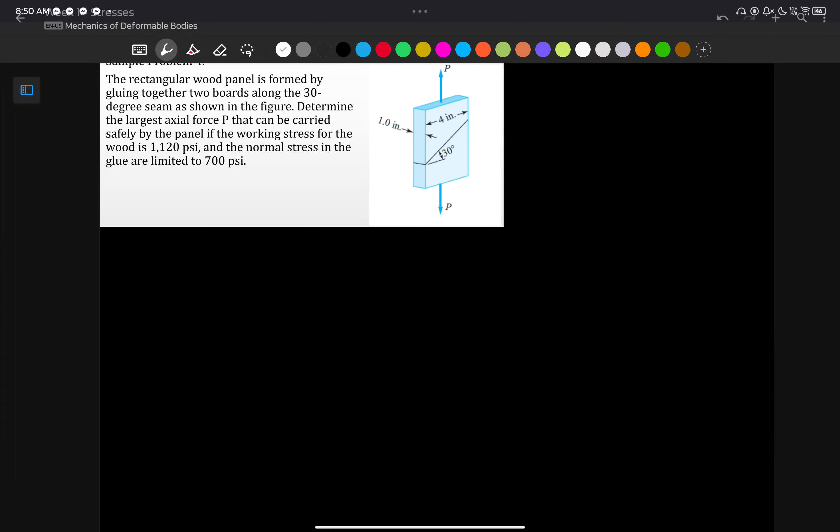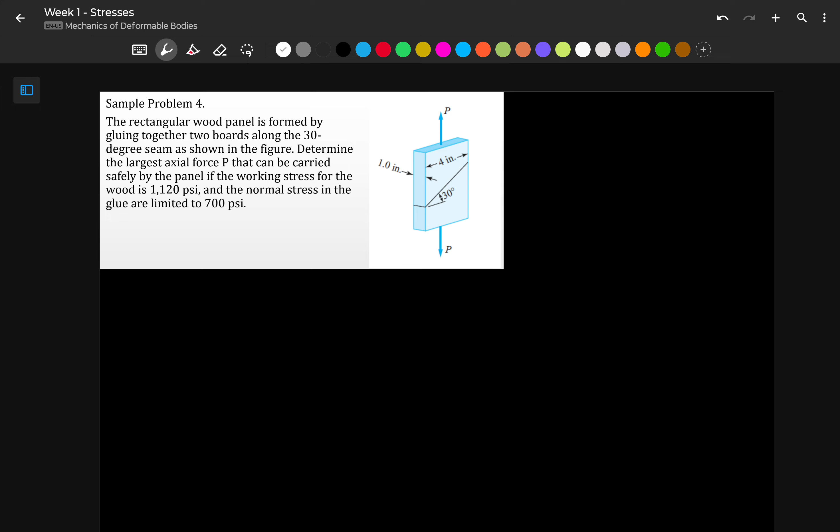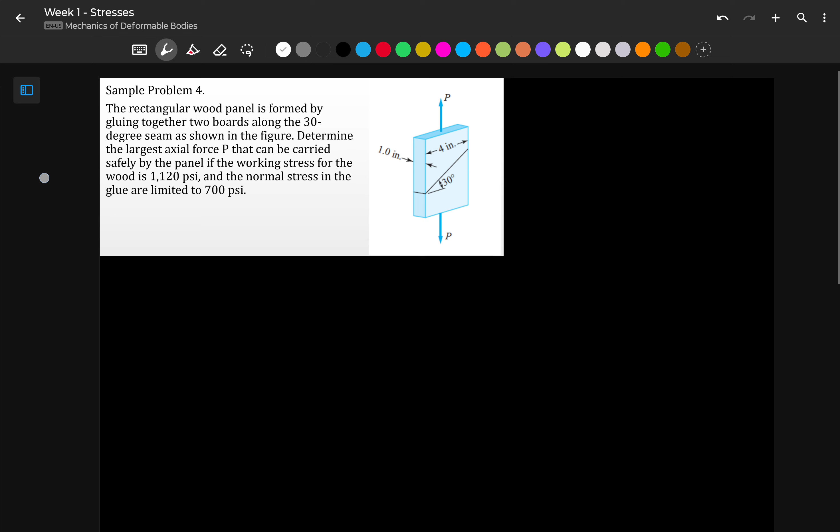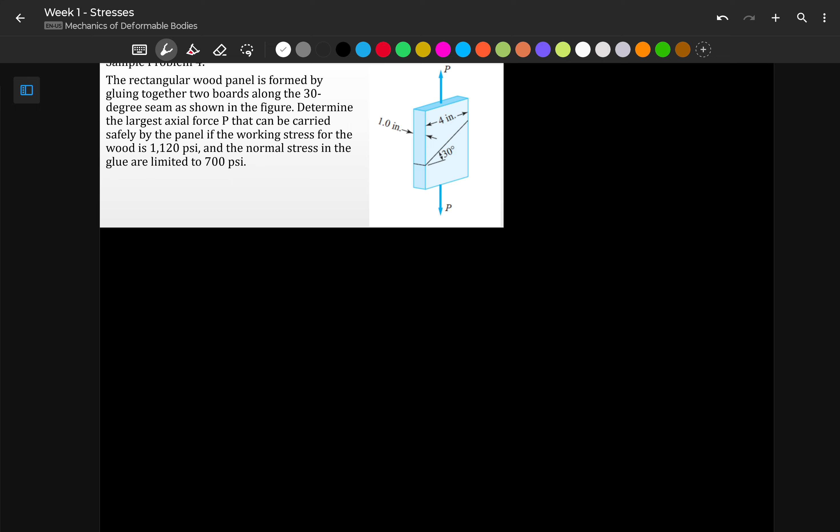Let's do sample problems, starting with sample problem number 4. We have a rectangular wood panel formed by gluing together two boards along a 30-degree seam, as shown in the figure. Determine the largest axial force P that can be carried safely by the panel if the working stress for the wood is 1,120 psi and the normal stress in the glue is limited to 700 psi.

So we have two working conditions. This one is just the capacity of the wood. Let's take the first one. It says here, the working stress for the wood, so the capacity of our wood to carry is 1,120 psi. Whereas the capacity of our glue is 700 psi. Let me draw the figure.

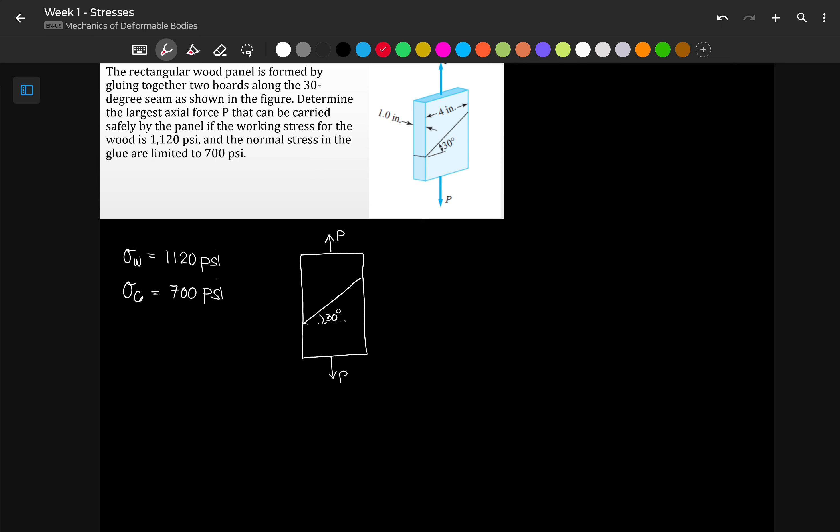Now we have to imagine how this could fail, because the area where the failure happens is the one experiencing stress. One area won't break if it's not experiencing stress. So we have to imagine the possible scenarios where this wood could fail.

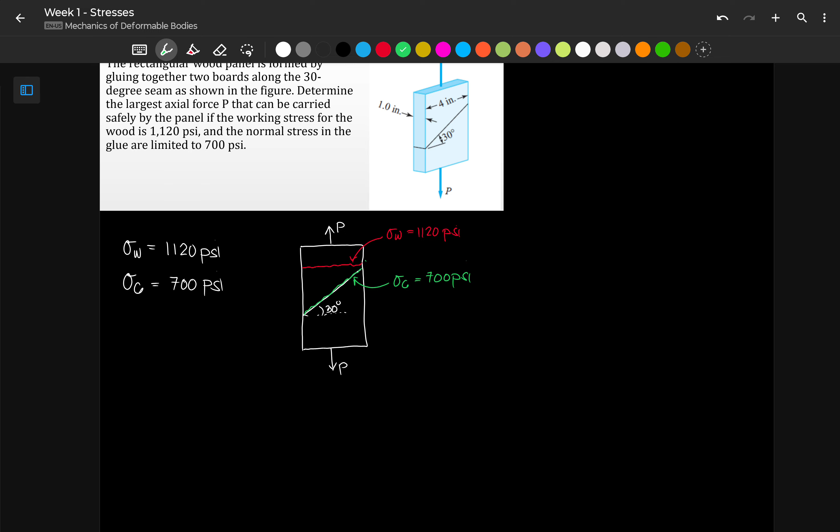So let's look at failure on the wood. When the wood itself fails, what happens is... let me draw the figure.

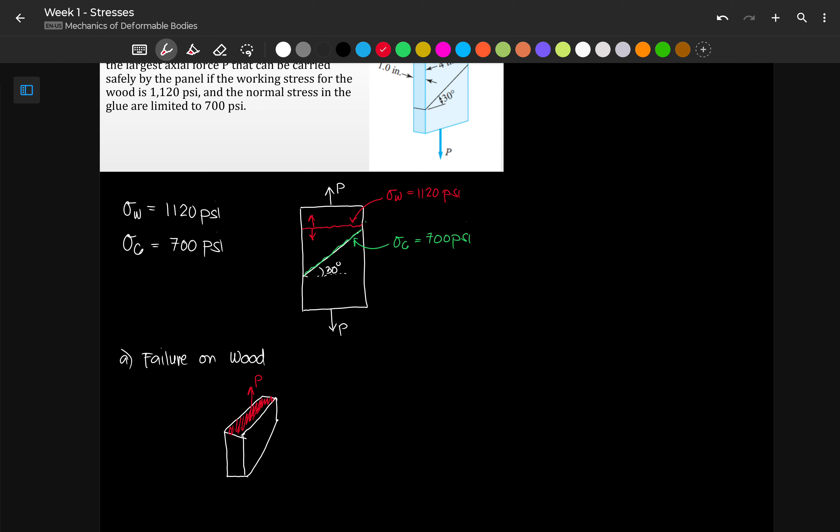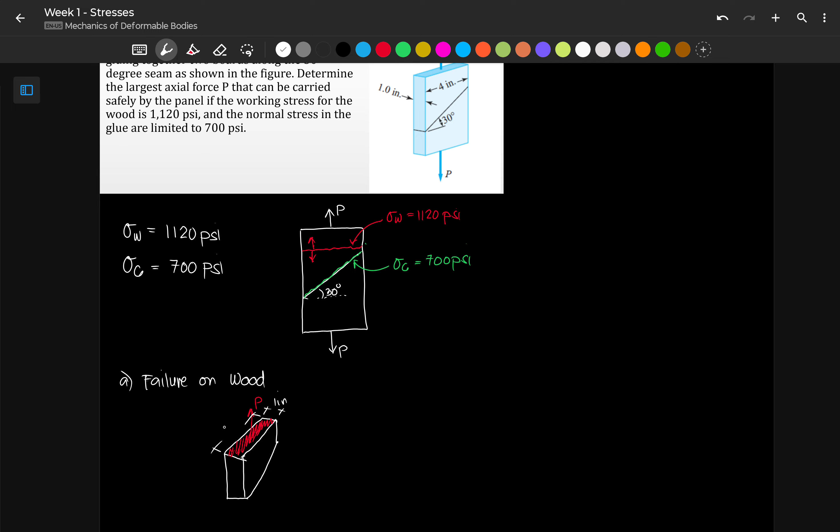According to the figure, the dimension of this area has a width of 1 inch and a length of 4 inches. Therefore, the area that resists P is just 4 inches by 1 inch. This is the area that resists so that the wood doesn't break.

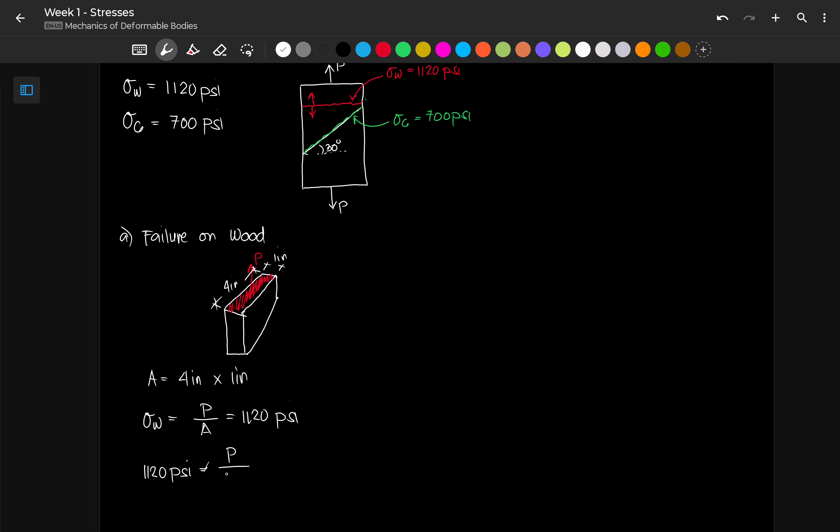Now, computing the stress, that's just P over our area. According to the problem, the capacity of our wood is 1,120 psi, which is all it can carry. So this 1,120 psi equals P, which is what we're solving for, divided by the area of 4 square inches. So our P here will be 4,480 pounds.

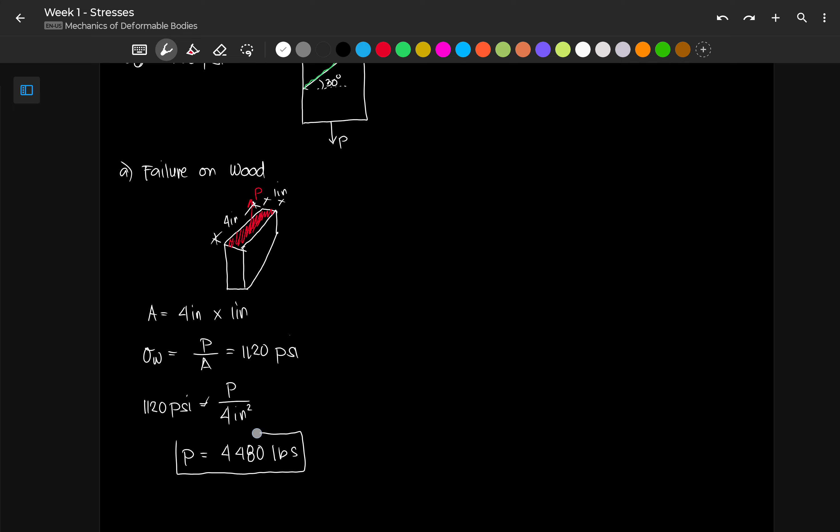That is the force needed to break the wood in this failure mode. So this is based on the capacity of the wood. You can also call this based on the capacity of wood.

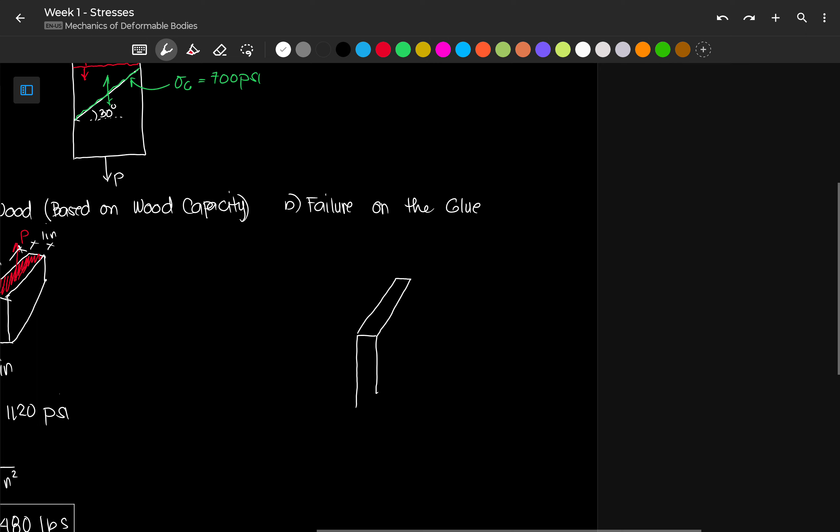Okay, so this is the lower half. Meron pa rin tayo ditong 30-degree seam.

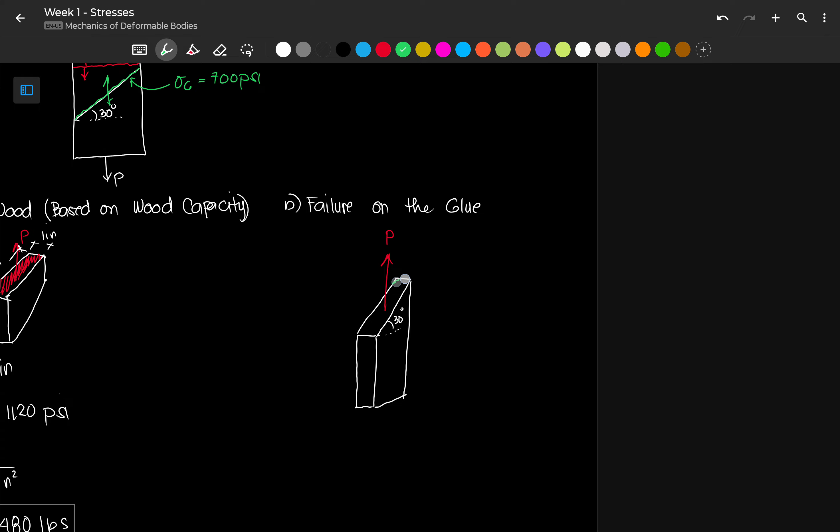Alright, now yung force natin is meron tayong naka-applied na vertical force, P. But take note, kung ang failure natin ay paghihiwalay ng glue, breakage ng glue, therefore ang area ang nagre-resist niyan ay itong wood area, di ba? So hindi naman pwedeng hindi yan yung magre-resist kasi siya nga yung nag-fail. Therefore, siya yung nagre-resist ng load.

Kung ito drawing natin in side view, mahirap kasing i-visualize dito. Gusto ko lang maipakita sa inyo kung ano yung itsura pagka naka-ISO.

Ayan, so meron ta rin tayong force P dyan. Pero take note, sabi sa atin, ang normal stress dapat perpendicular sa area. Kung naka-incline yung area natin, therefore the force acting on this is dapat perpendicular dito.

That is P sub N. Okay, so sorry, the direction is wrong. It should be tensile kasi pinaghihiwalay natin siya. We are not compressing it. So this is our PN. Hinihila natin siya, normal direction.

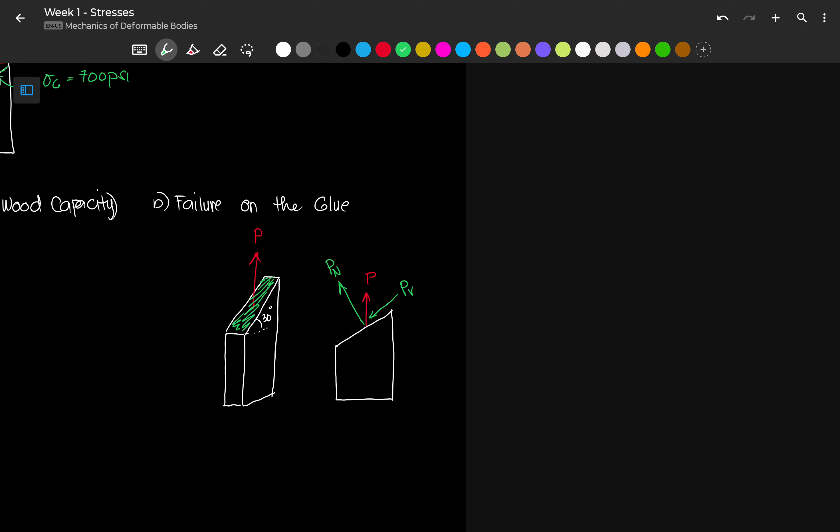Magkakaroon din tayo ng component dyan. Tawagin natin PV, okay? So PV is the shear force na nangyayari dito. Now, sabi natin, since this is 30 degrees, PN and PV supposedly ay sila ay right angle or perpendicular. Therefore, ang may iwan sa atin dito is 30 degrees.

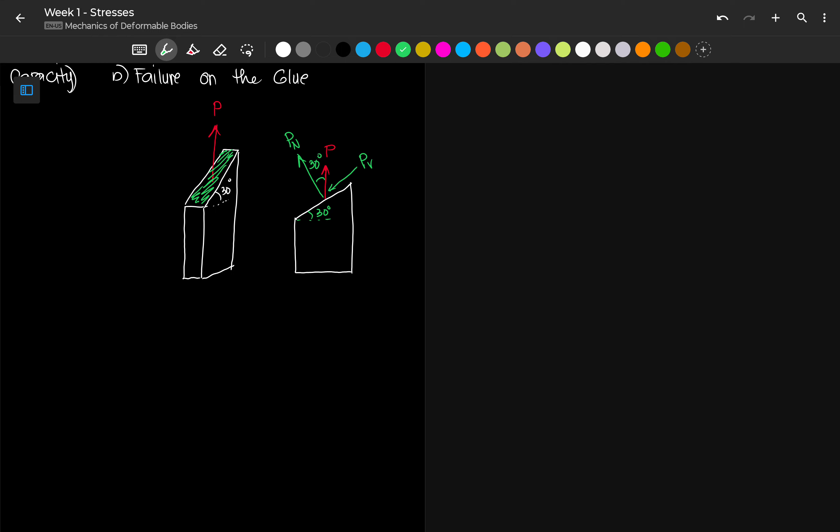Lilipat siya sa taas, we did some discussion about this last time. Okay, so therefore, we can say but using our force polygon, pwede tayong mag-force polygon. We have here our P, upward.

I apologize for the direction of PV, it should be towards outside. Okay, so PB is towards dito.

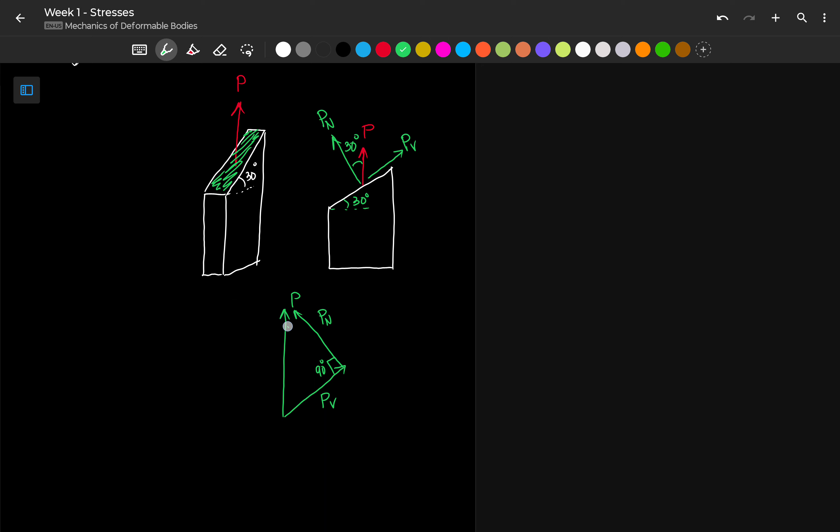This is our PV, then meron tayo ditong PN. Ito ay 90 degrees, at ito naman ay 30 degrees. So meron tayong right triangle.

Pag iniredraw natin ito ng nakatayo, kung nalilito ka ng naka-incline yung right triangle natin, i-drawing natin ng nakaayos. Okay, so yan, ito yung resultant P natin.

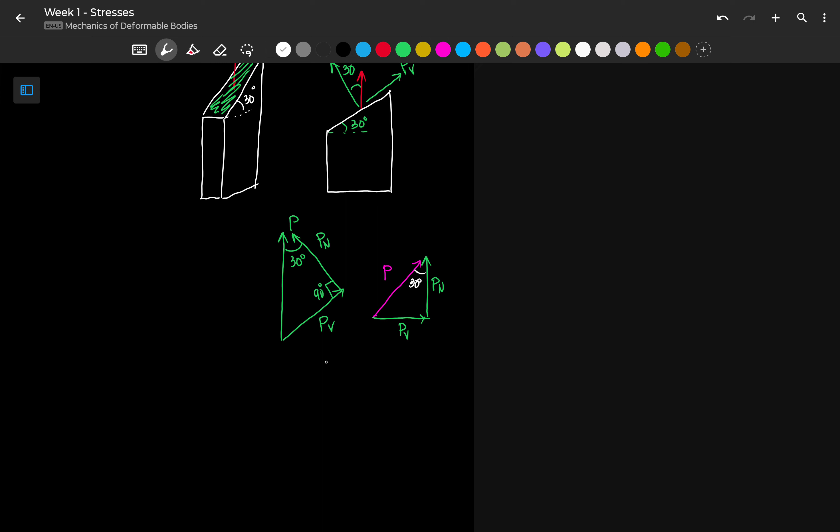These are the component PN and PV. So dito, pwede natin sabihin na since ito ay 30 degrees, we have an adjacent and a hypotenuse. So we can say that cosine 30 degrees is equivalent to adjacent side PN over the hypotenuse P. Therefore, PN is P cosine 30 degrees. Okay, so that is our force.

Now, puntahan naman natin yung area. That is one component of our calculation. So dito, ang thickness natin ay 1 inch, at ang alam nating lapad nito ay 4 inch. Okay, pero take note na naka-inclined yung area natin. So hindi pwedeng 4 times 1.

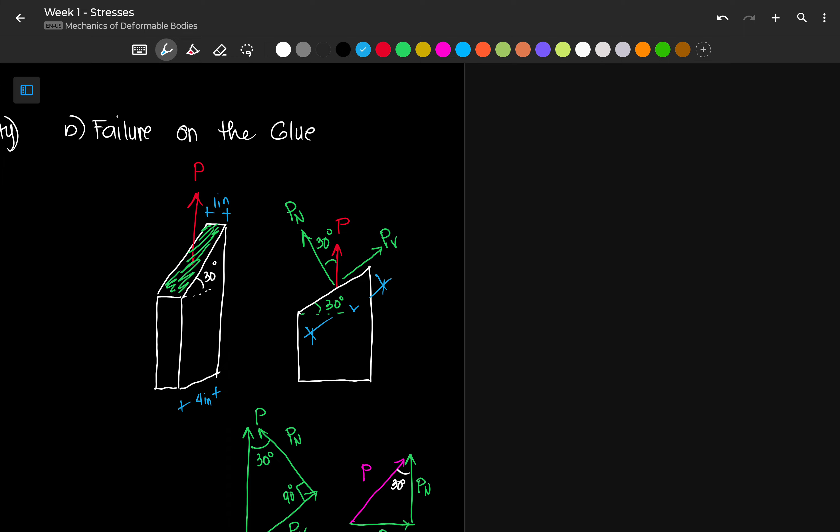Kailangan natin kunin yung length ng inclined plane na ito. Let's call it length, para malaman natin kung ano yung area ng rectangle na to. So from the triangle, we can say na meron tayo ditong right triangle ulit. This one is 30 degrees. Ito ay length L, iyon yung hinahanap natin.

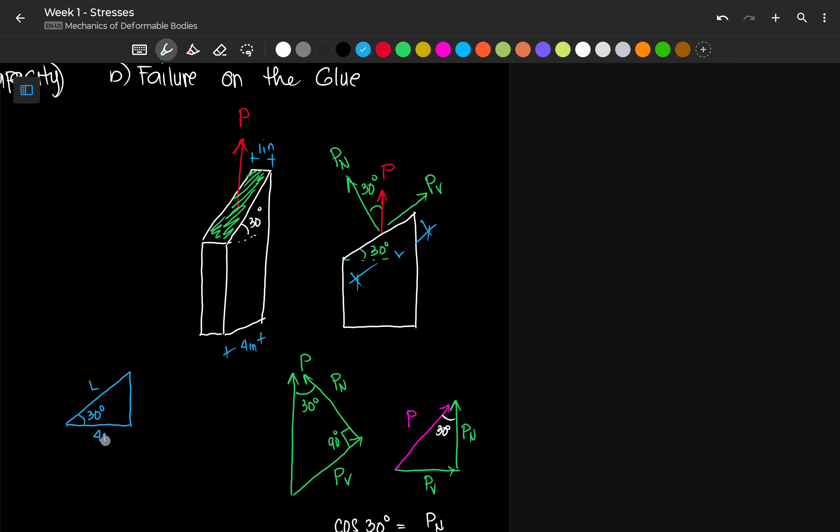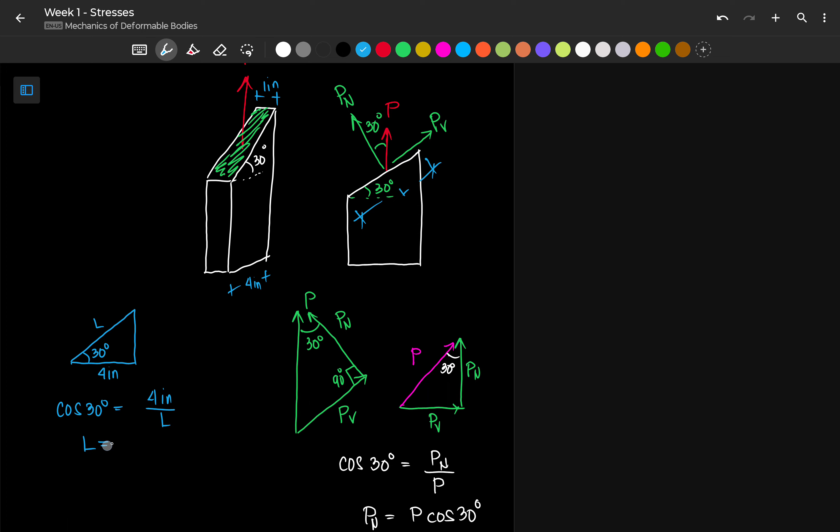And yung nasa bottom side is 4 inches. Okay, so again, similar sa kanina, meron tayong adjacent, meron tayong hypotenuse. So cosine 30 degrees is equivalent to the adjacent na 4 inch over L. Therefore, L is 4 inch over cosine 30 degrees.

So our area now that nagre-resist nung normal force PN is actually 4 inch over cosine 30 degrees times yung outing thickness na 1 inch. Okay, so therefore, the area is just simply, sorry, ba't nagka-random 4 dito? Okay, this is 4 inches squared over cosine 30 degrees.

Okay, so from here, we can now calculate our stress. Sasabi natin, the stress on the glue is equivalent to P cosine 30 degrees over 4 inches squared over cosine 30 degrees, or that is P cosine squared 30 degrees over 4 inches squared. So that will be equal.

According to our problem, it is only limited to 700 psi. So therefore, we can now get the value as 700 times 4 over cosine 30 squared. What we have is 3733.33 pounds, so that is our P.

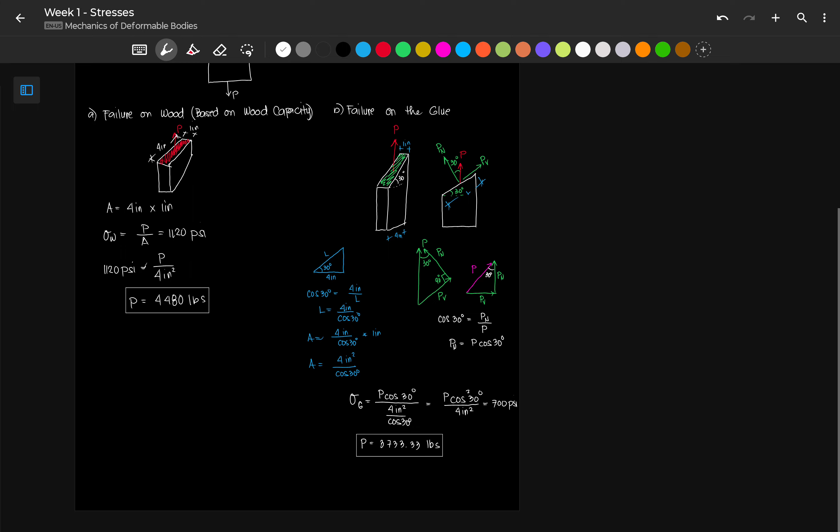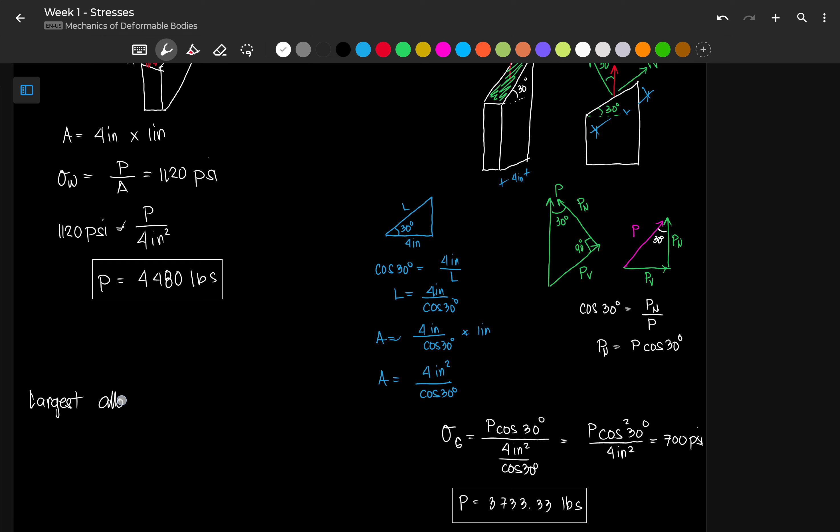Okay, now we have two values of P. The question is, sino yung pipiliin natin? If we are talking to the largest allowable force or load, hanggang saan lang yung kaya, ang pipiliin natin ay yung smaller. Okay, so in this case, our P is...

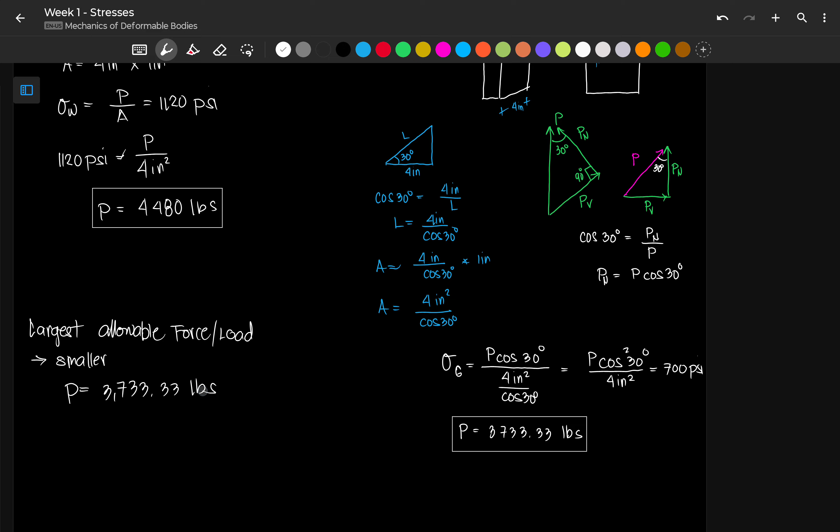3733.33 pounds. Okay, now if ang tanong sa atin ng problem is hindi yung largest allowable force, pero ang sinabi lang, largest force carried. Ibig sabihin, hindi given sa atin yung allowable force. Ang hinahanap nito ay yung calculated or actual, then ang pipiliin nyo ay yung largest. The difference between the two is, dito, meron tayo ng given na working stress, working strength, or capacity. Kailangan na lang natin mamili ng load na kaya lang niyang i-carry.

Dito naman, possible ang mga tanong ay kailangan nating pumili ng section para doon sa load. Let's say, sabi ng problem, find - yung beam daw nagka-carry ng 100 kN, find a section. So therefore, yung 100 kilonewton na yon, that is the force.

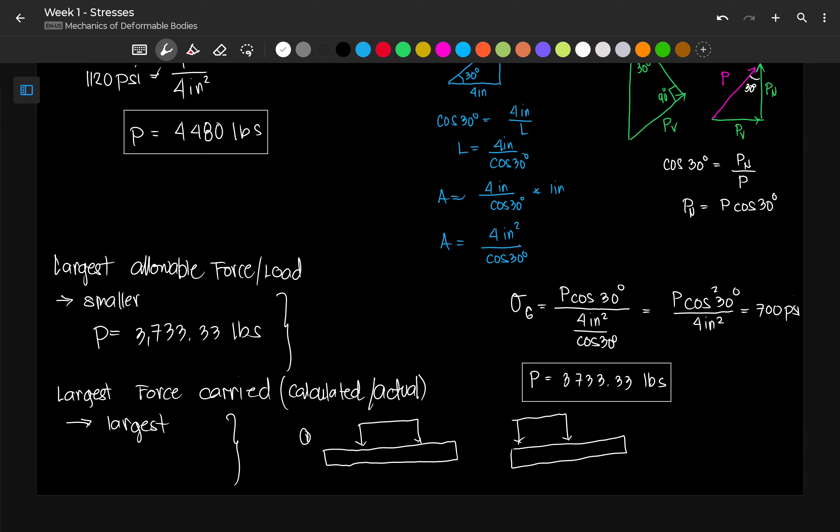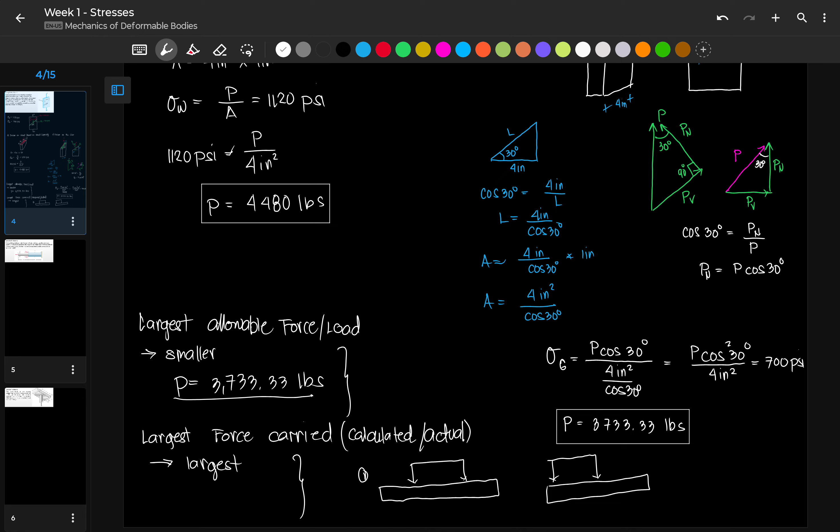So pagka ganon, ang pipiliin natin ay yung maximum kasi i-design natin yung structure to the maximum load. Pero kung pipili lang tayo ng capacity load niya, ano lang yung kaya niyang dalhin, pipiliin natin yung mas mababa, yung akma lang sa lower strength niya. So our answer here is 3,733.33 pounds. Next, we have sample problem number 5.

Sabi dito, two solid cylindrical rods AB and BC are welded together at B, loaded as shown. So determine the magnitude of force P for which the tensile stress in rod AB has the same magnitude as the compressive stress in rod BC.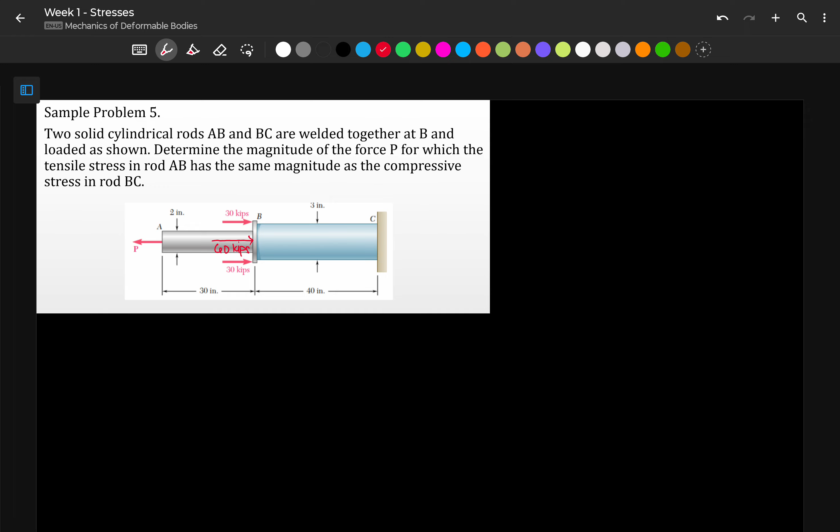Okay, so meron tayo ditong force system na meron tayong tensile load P which is unknown. Then meron tayong dalawang 30 kips on the edge of our connections between AB and BC. Now, since may 30 kips tayong dalawa, pag pinagsama ko ito, ang resultant nila sa gitna ay 60 kips para maging axial. Sabi natin, kailangan natin silang i-treat as axial. So, itong dalawa, they are producing - hindi pala ito couple, but they are eccentric. Pero since nagbabalanse sila, nagiging axial lang din na 60 kips.

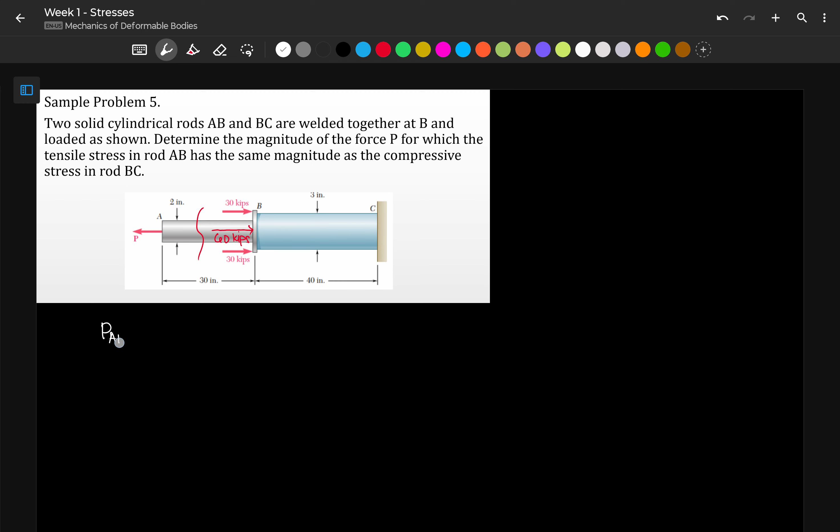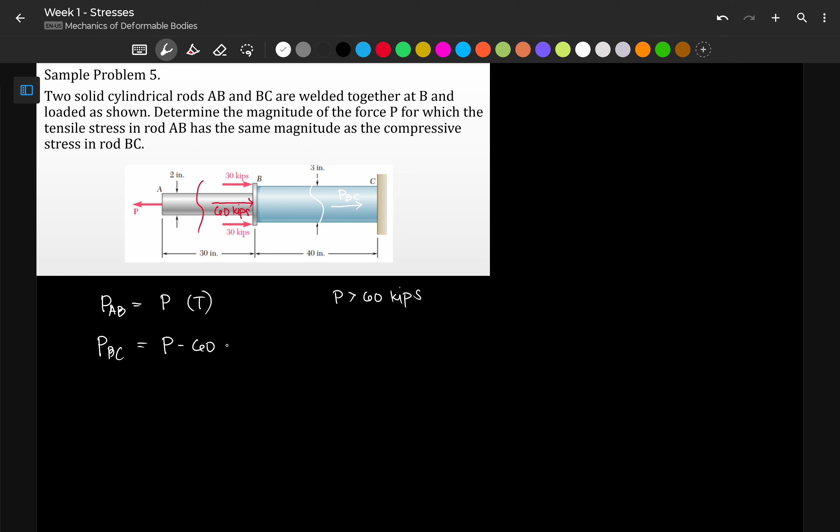Now, by method of section, we can say that yung ating force dun sa AB is equivalent sa P, which is tensile. Then, we have the force on BC. Kapag kinat naman natin yung section na ito, we can assume that P is larger than 60 kips. That is the condition. Ibig sabihin, kung P is greater than 60 kips, mas malaki yung value ni P, our force here will be towards this direction. Therefore, this is our PBC. So, our PBC is P minus 60 kips. So, we have two force conditions.

Okay lang yan, any assumption. Kung ang i-assume naman ay P less than 60 kips, so baliktad naman yung direction ng force nito. Pero actually may sinabi yung problem na miss out natin. Sabi dito, may tensile stress in rod AB tapos compressive naman sa rod BC. So, let me redraw this. Meron parang correct assumption na ibinigay sa atin yung problem.

Sabi ng problem, pag nag-cut ako ng section dito kay member BC, meron maiiwan sa akin na compressive force na PBC. Whereas may applied load dito na P, then meron ditong 60 kips. Pwede ninyo ilagay dito yung force, pwede rin naman dito, pwede rin dito ninyo ilagay - okay lang din, pareho lang yun. So, since compressive, we can say that P is less than 60 kips, mas mababa sa 60 kips.

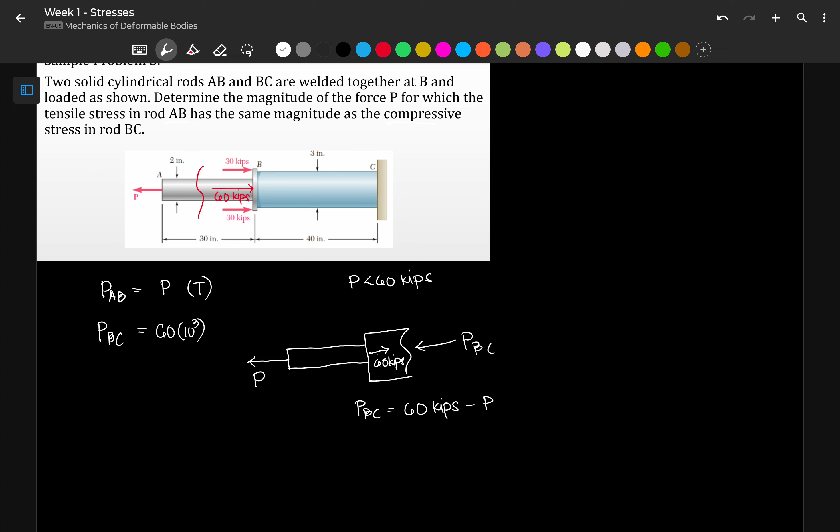So, PBC is equivalent to 60 kips minus P. Ilagay muna natin na 60,000 para pounds yung makuha natin, naka-base unit tayo, minus P. So, this is our force. According to the problem, dapat equal daw yung nararanasan nilang stress - yung stress daw sa AB ay equal din sa stress sa BC. Therefore, we have here ang stress natin sa AB, that is P, over ang ating diameter ay 2 inches.

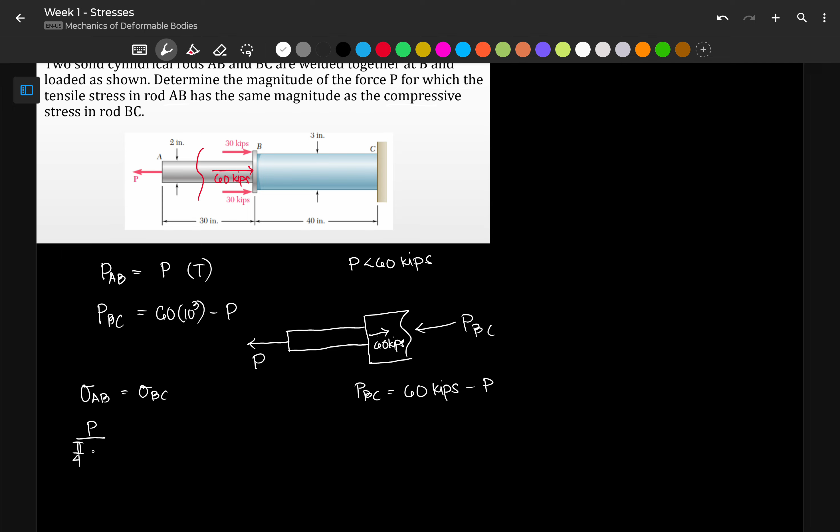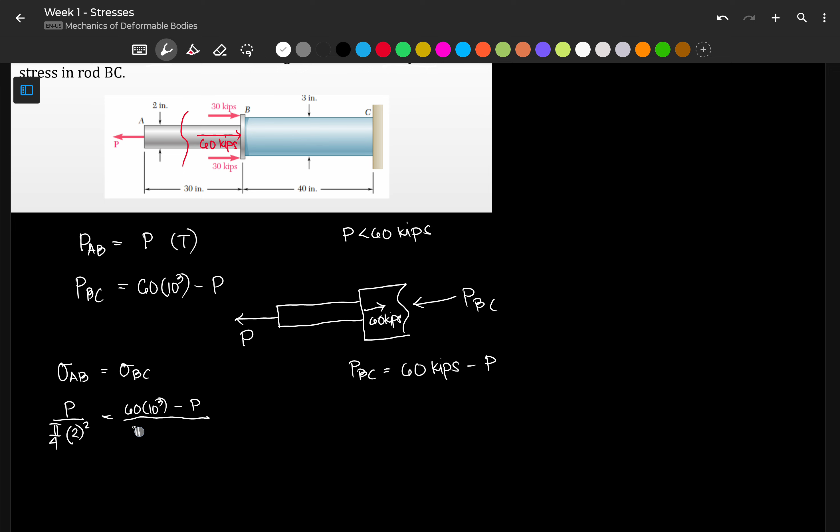So, this is pi over 4, 2 squared. And that is equal daw sa ating namang compressive stress sa BC, which is 60 times 10 to the 3 minus P over the area, pi over 4, 3 squared, pi d squared over 4. So here we can now solve for the value of P.

Pwede na nating alisin yung pi over 4, so we have x over 2 squared equal to 60 times 10 raised to 3 minus x over 3 squared. Shift solve na lang tayo. So we have here P equivalent to 18,461.538 pounds, or that is equivalent sa 18.46 kips. So this is our answer for this problem.

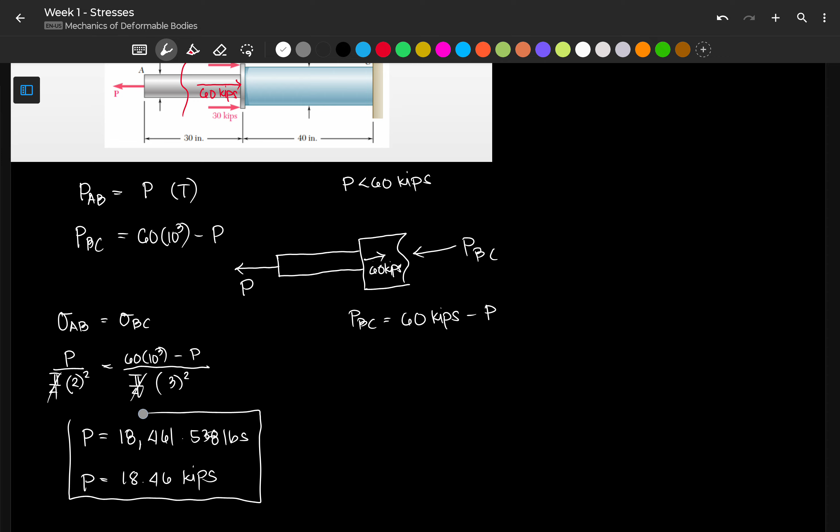So medyo madali pa ito. Okay, next one is what we have here.

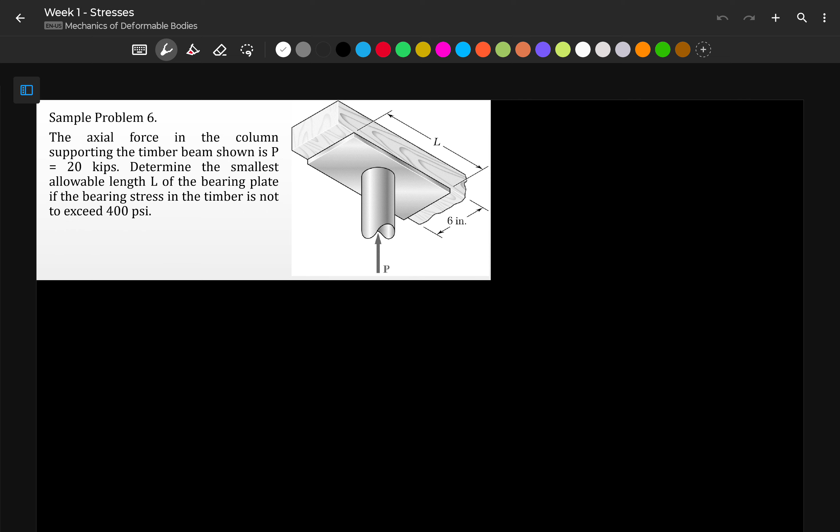So the axial force in the column supporting the timber beam shown is P equal to 20 kips. Determine the smallest allowable length of the bearing plate if the bearing stress in the timber is not to exceed 400 psi. So what we have: the allowable stress is 400 psi, and the value of P is 20 kips.

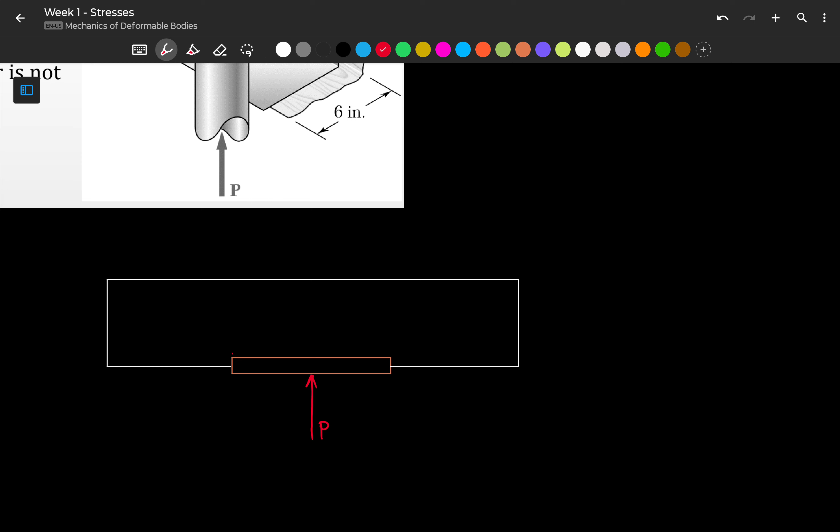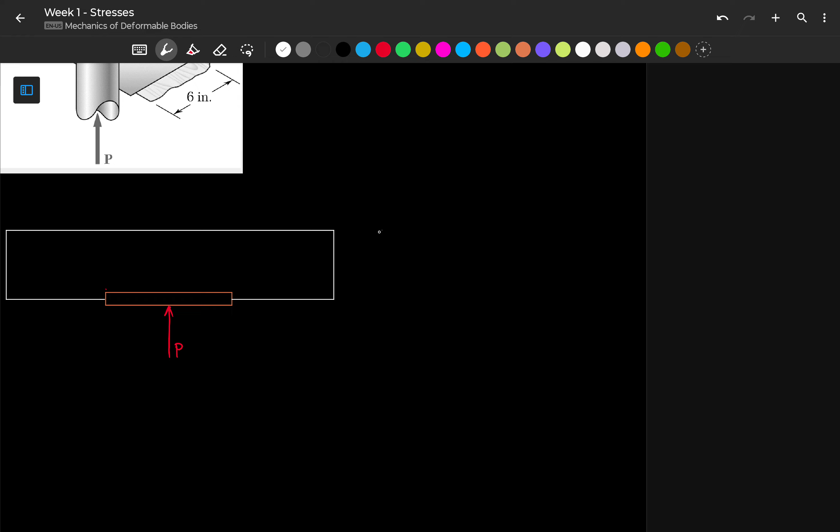And that area, of course, is resisted by the bearing area. What is our bearing area? If I draw our top view, front view, bottom view in this case—this side, this bottom side—here is our bearing plate.

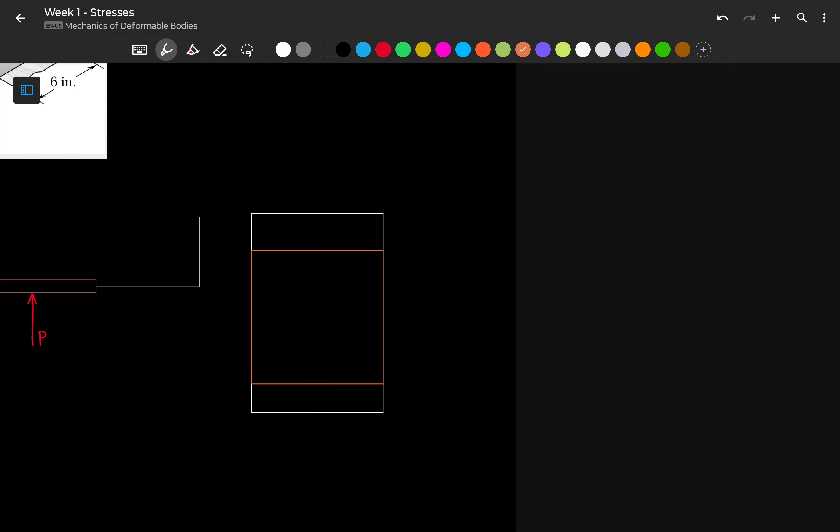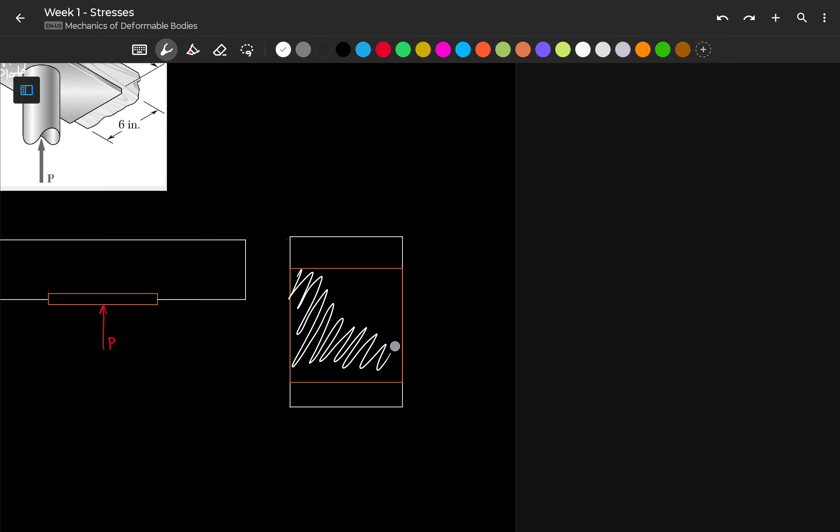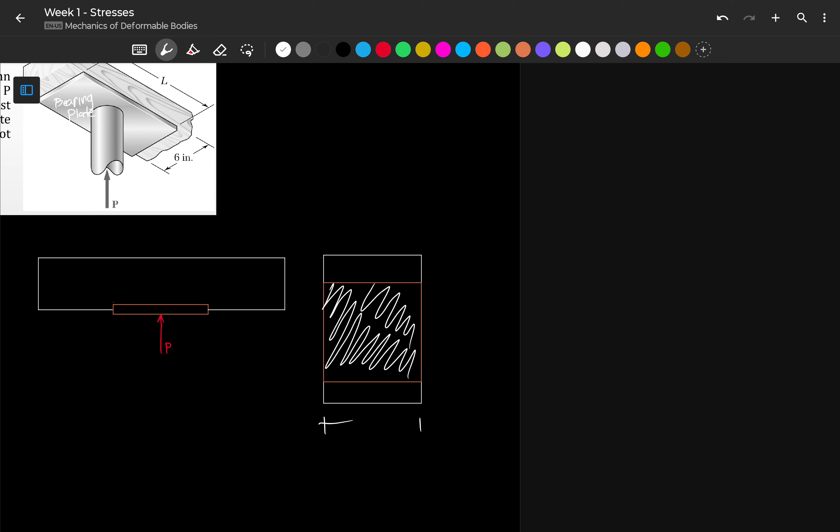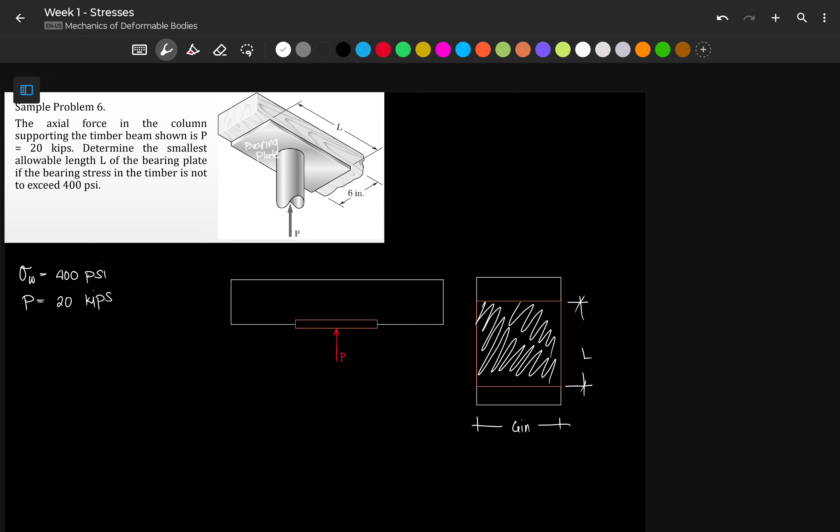So in this case, according to our problem, this is 6 inches, and we don't know the length of the bearing plate yet. This is an example of a design problem—we're designing the dimension of the bearing plate to minimize failure, so that bearing failure doesn't happen. Because if we reach 400 psi, the timber will start to notch or get gouged out by the bearing plate.

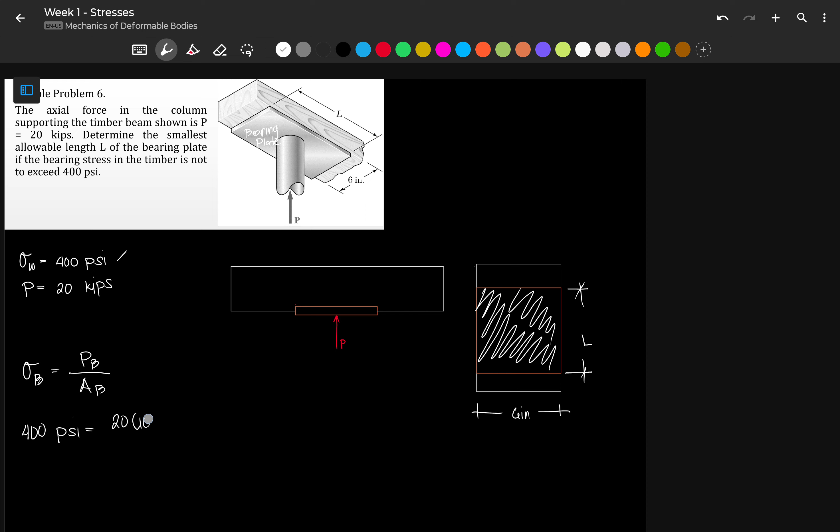So we want to avoid reaching that point to keep our condition safe. We say that our bearing stress is equivalent to the force causing bearing over the area of bearing. So this is simply 400 psi equals 20 kips, or 20 times 10 to the 3 pounds, divided by the area of bearing, which is 6 inches times L. We don't know the value of L.

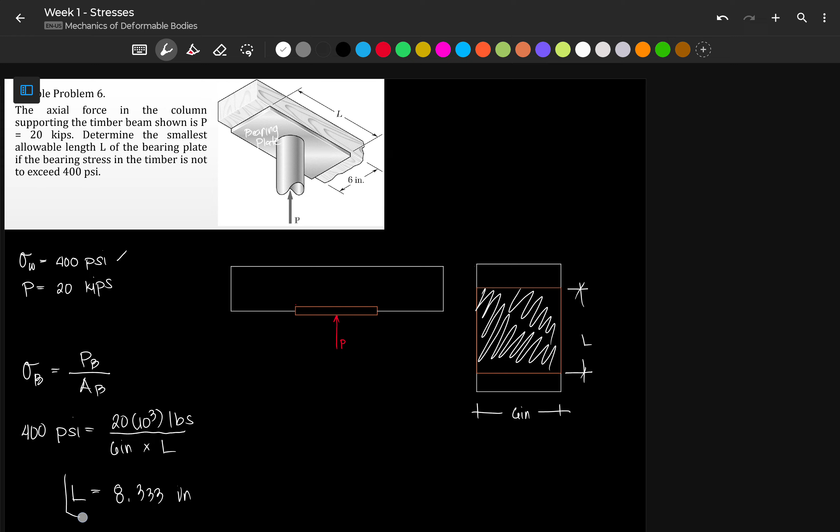Therefore, L equals 20 times... L is 8.33 inches. Now, if the choices given are letter A, 8.3; letter B, 8.4; letter C, 8.1; letter D, 8.2.

When we're designing members or elements and dimension is what's being discussed, we will choose the largest. So you would pick 8.4, because 8.3 is insufficient—it's too small. If we substitute 8.3, we get 20 times 10 to the 3 over 6 times 8.3, which equals 401.606. So this is already greater than the capacity.

If this exceeds the capacity, the bearing plate will start to gouge into the wood—it will start to sink in, and our wood will start to deform. If you choose 8.4 instead, the stress you get is 396.825. So this is safe, since it's less than our working stress. Therefore we can say this is safe.

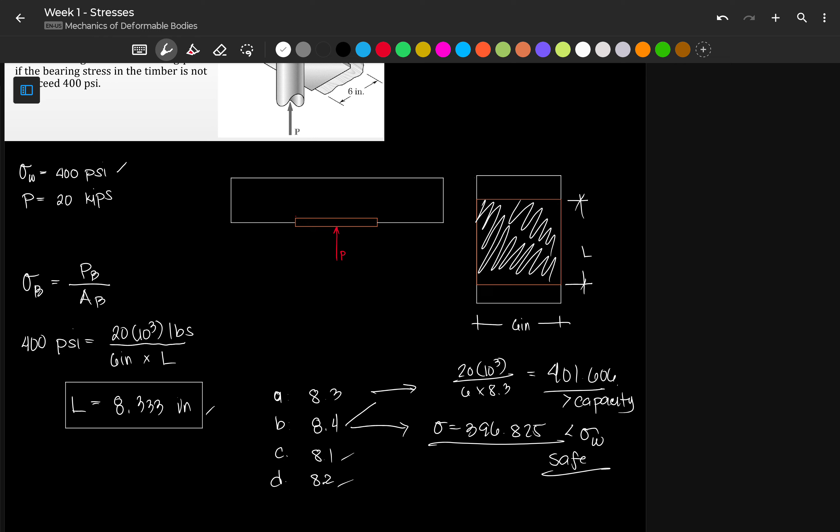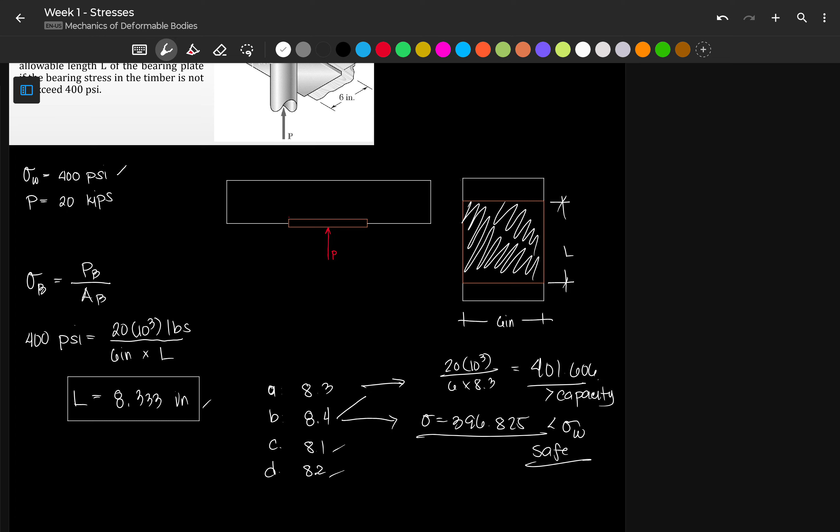What you end up using is only around 380 out of 400. That's good in terms of safety—you have a factor of safety. But economically, it's not good. We have to balance economy and safety. So we should maximize the capacity of the material.